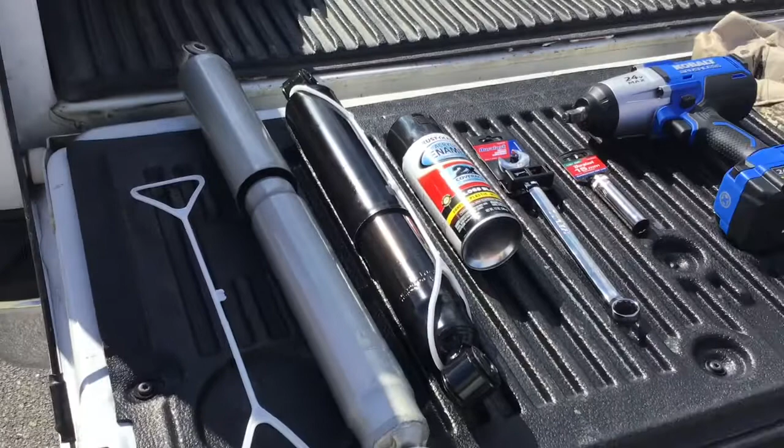Alright, so the parts we're going to need today are laid out on the back of my tailgate. We've got the two shocks, they come with the strap attached to make it easy for installation. But I guess I didn't verify the color, so I bought some paint too because I've got to paint this other shock while I install the first black one. I did check sizes.

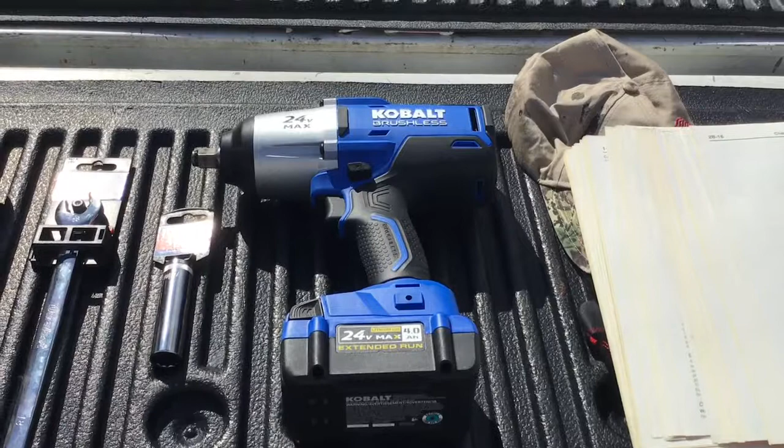They're metric bolts, an 18 on the nut and a 15 mil on the bolt. And over here I've got a 1/2 inch impact wrench, brushless, that I'll be using. Should be a quick install. And then obviously hat and gloves to protect myself.

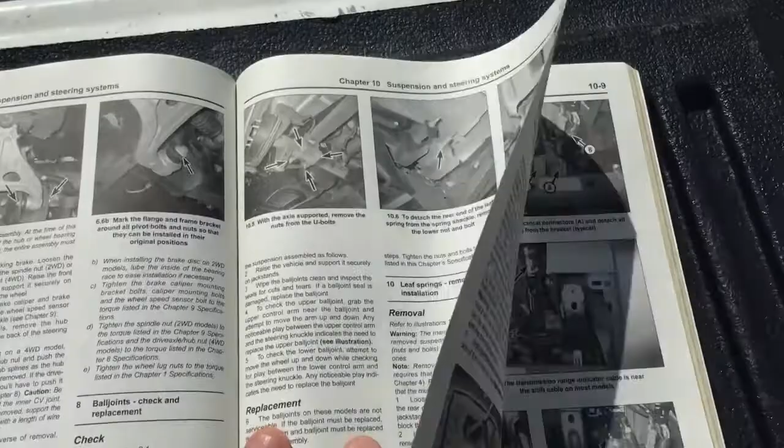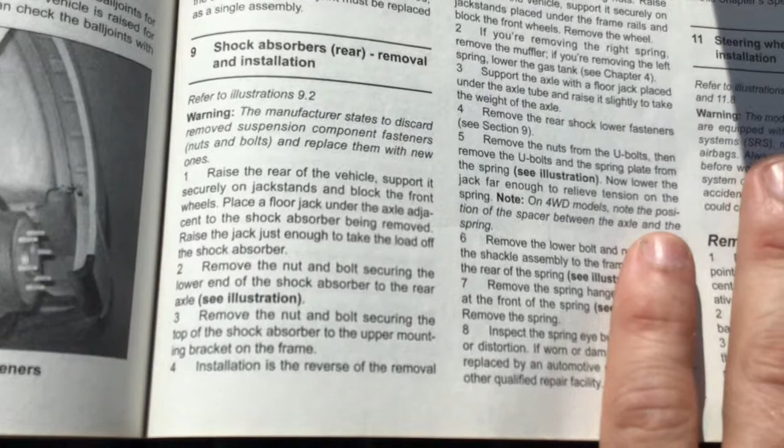Pretty important, the repair manual we're going to flip to figure out exactly how we're supposed to install these. We're going to open it up to chapter 10, suspension and steering systems. And here it is, shock absorbers rear. Pretty easy: raise the rear of the vehicle, supported on jack stands, which I've chosen not to do. I've watched enough videos that show you can do it simply from the ground.

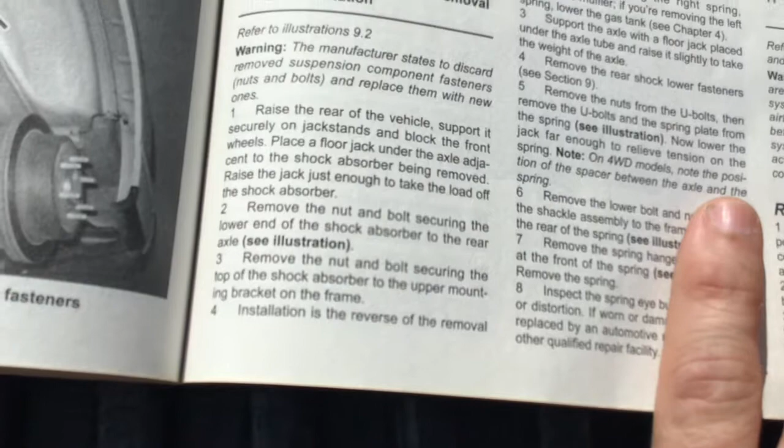Remove the nut and bolt securing the top and securing the bottom. Installation is reverse, pretty easy. Here's the picture. All we're going to do is take off those two nuts, pull it out, put it back in, and away we go.

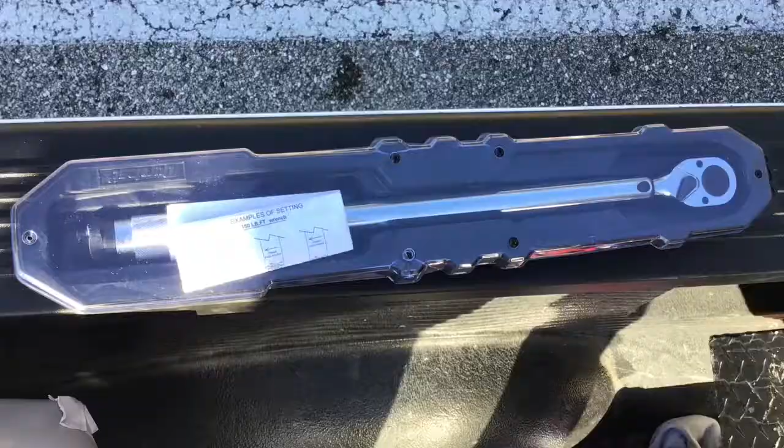We're also going to need a torque wrench because the settings on the bolts are 66 foot-pounds of torque, so we need to make sure we do that correctly.

So I forgot a crowbar because I'm not jacking up my truck. I'm going to need some leverage to get that shock out.

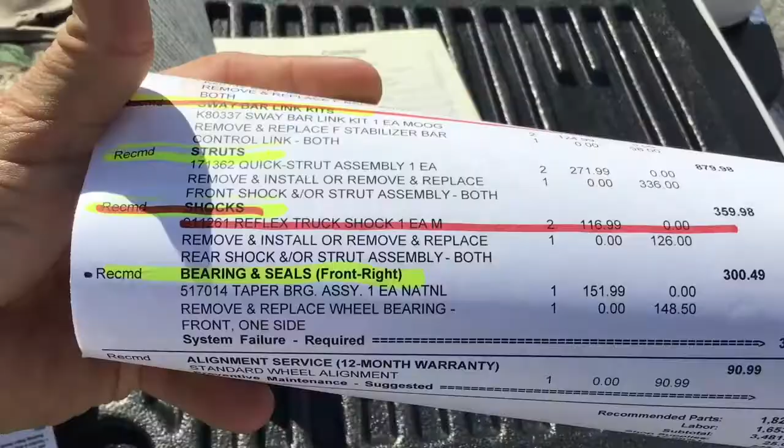So you can see here it says shocks, remove and replace, 360. That's what we're trying to beat today. I don't know if you did your math while going through all those items there, but right now, without labor, we're not even close to that.

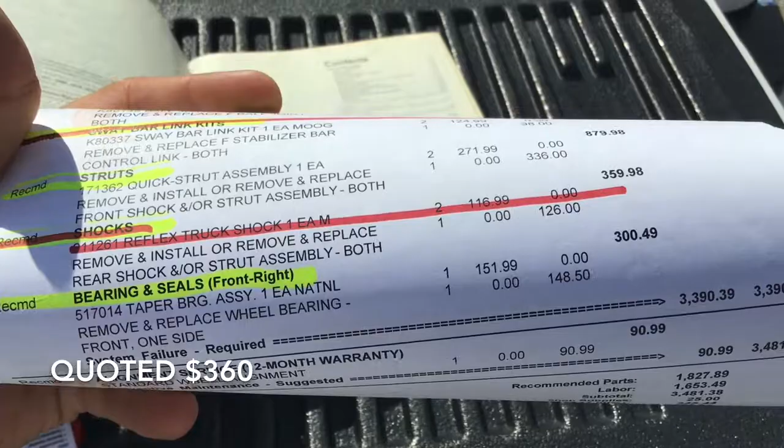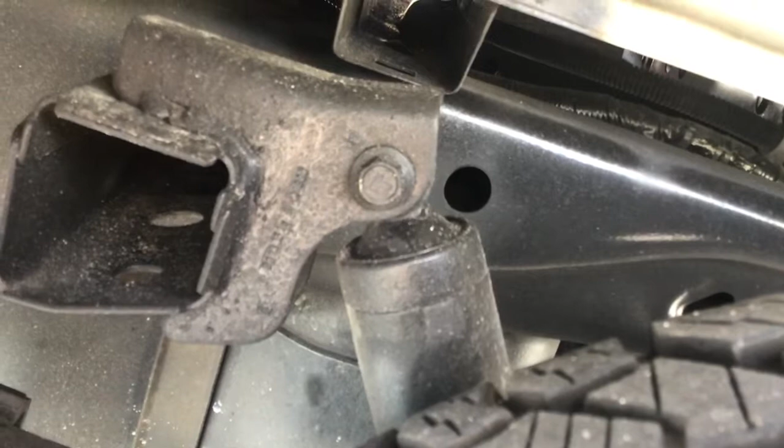So the rear shocks of my truck are simply attached right behind the wheel with a 15 mil bolt and an 18 mil nut. There's the top, and if we slide down here and get under, you can easily see right there is the bottom side. So all we're going to do is take those two nuts and bolts apart and replace the shocks.

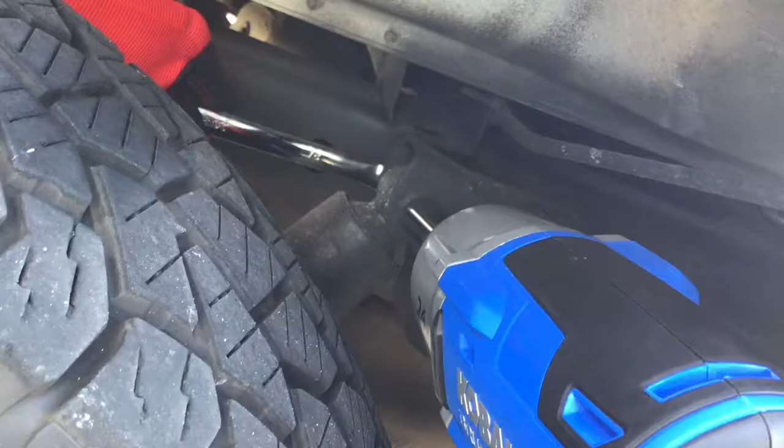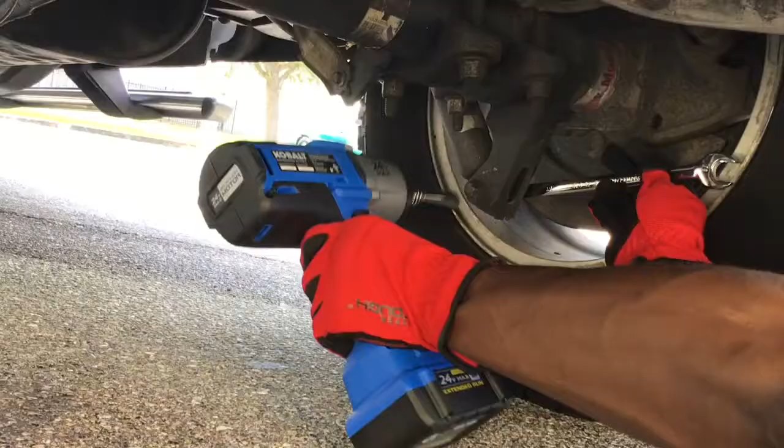Alright, so we got the impact wrench on the bolt, we got our standard wrench on the nut, and we're just going to take it off. There we go. Alright, so got some help here today. Actually, there we go, perfect.

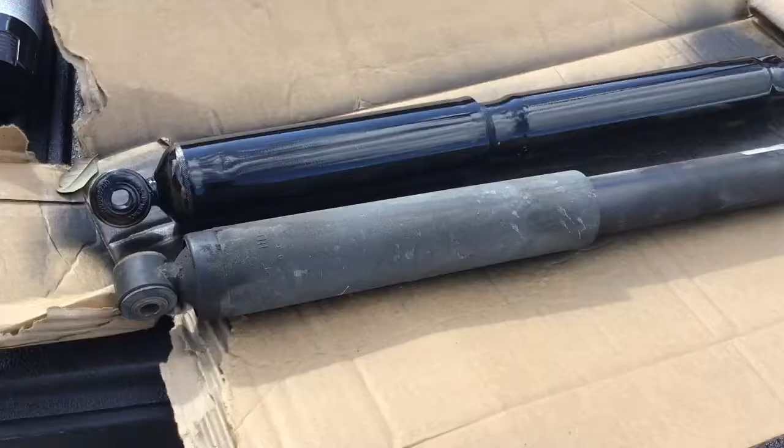Okay, so now we're down to the bottom, and we're just gonna go ahead and do the bottom. Simple as that. So I've extended them.

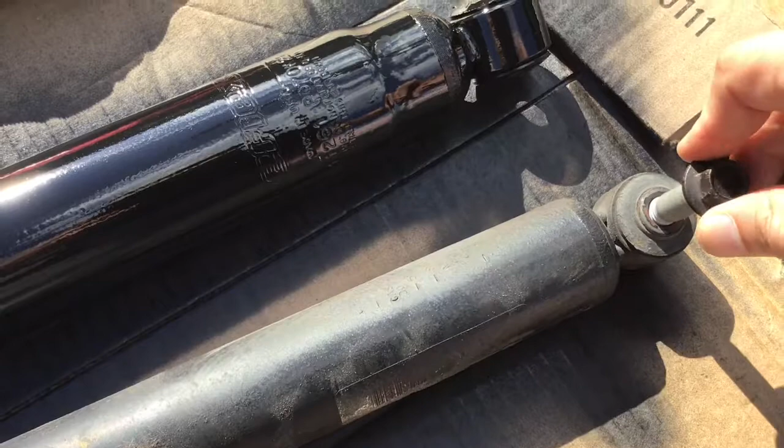I'm going to check the bolt spacing. This one I did not even need my crowbar to take out. Okay, so I got the two. This is the old one, take a look at the spacing. Clean, snug. Way too much movement, this is a 15 mil. I gotta look for either a 16 or a 17. Come back out, see what fits.

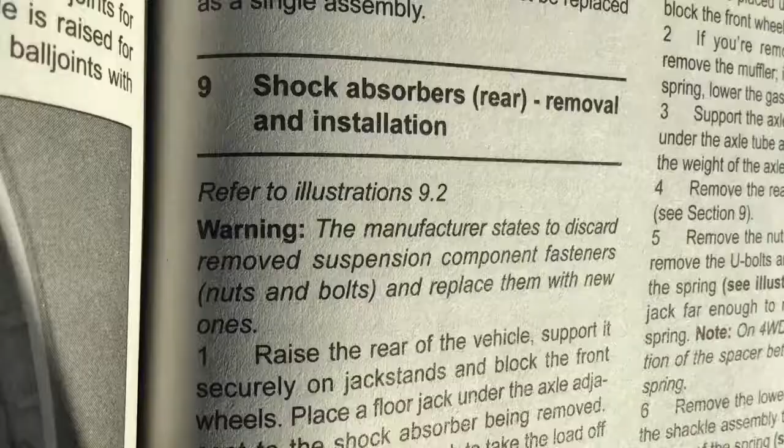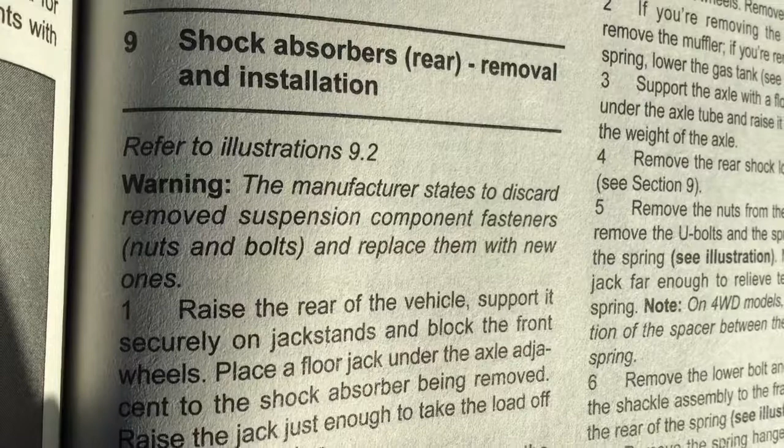So here's one of the reasons I did not discard the nuts and bolts. Take a look, we just ended up going with the same ones. It's a Saturday and I can't find hardened steel anywhere. Or maybe I could, I just don't want to be bothered.

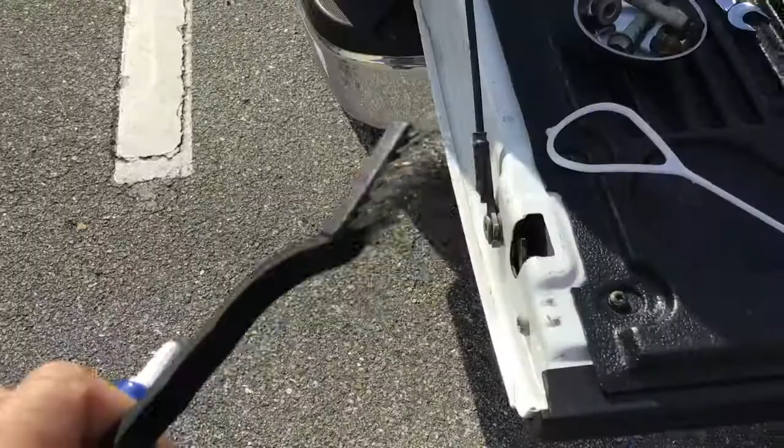So it takes another skill. So these ones are pretty clear, it says put this end down, so that's what we're gonna do. Two other things I forgot to mention: I've got a pan to keep my bolts and nuts from going missing, and then I've got a wire brush to clean them, and eventually you'll see I will need some Loctite on those threads.

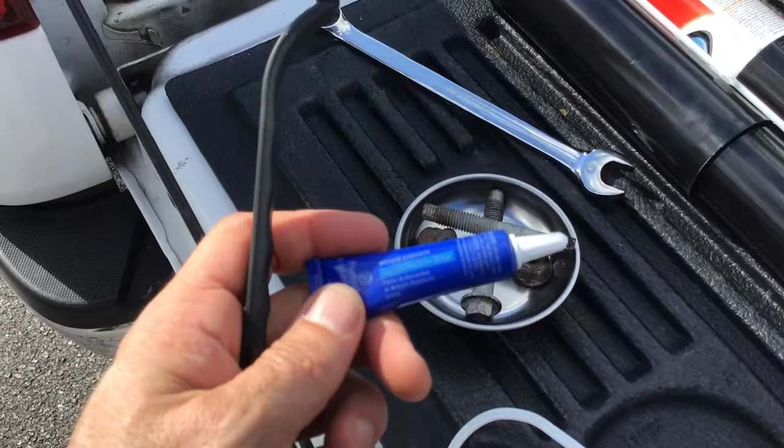Yep, so now we're just gonna clean the nut and bolt here, make sure we've got that rust off, and we'll put some Loctite on before we put it back in.

So this is not an instructional video or anything, this is just me and my life and what I choose to do and how I choose to live in the truck. So I say that because I had a friend stop by while I was changing my shocks, and he helped out. We had such a fun time, I didn't even bother videoing any more of the shocks.

We even did the fuel filter too. But here, I'll show you the shocks.

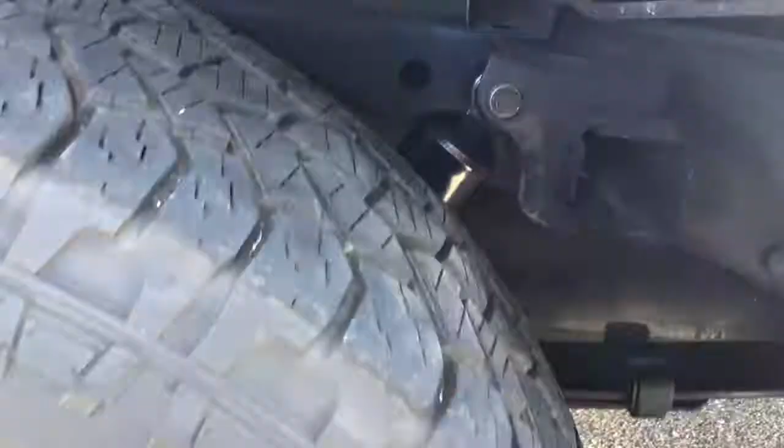Alright, so we've got our new shocks installed. I honestly didn't do anything about the bolt sizing, spacing. Maybe next week if I hear a big rattling, I'll change them, but they're in.

Oh, the birds like them. And there's a shot from the underside, attached. So we had a great time changing some shocks.

Like I said, we ended up changing the fuel filter too, but all out the door, I think I spent a total of $275.

And certain things I like, the torque wrench, it was fun, but it's not something I'll probably keep, I'll probably return it. So I saved some money, had some fun with a friend, walked away with an impact wrench, changed my own shocks, and got some knowledge. So I think it was a win.